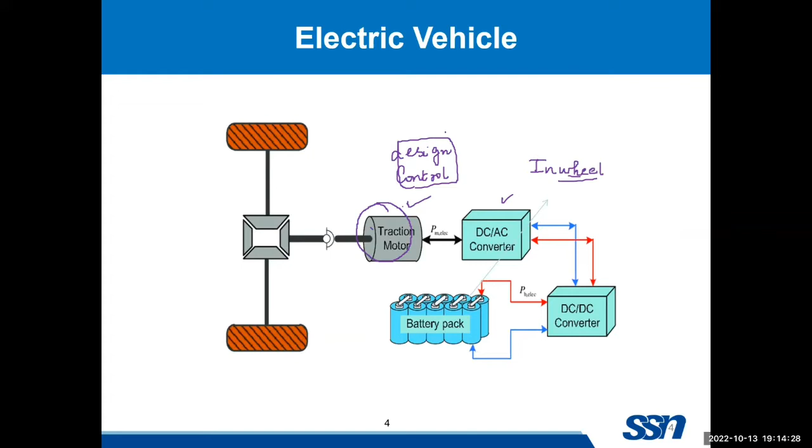So this is the general structure of the electric vehicle. And as I said, when you take electric motors, we have numerous choices of electric motors. The general classification is AC motors and DC motors. Here there are different classifications, and the AC machines are classified into asynchronous machines as well as synchronous machines.

And we know that synchronous machines have thrown up an area of what we call special electrical motors. The structure of the special electrical motors has emanated from synchronous motors. That is why they have classified the special electrical motors under the category of synchronous motors. We can have brushless DC motors, or pure permanent magnet motors. We can have a sine wave motor, a stepper motor, reluctance motors.

So these are all the wider configurations of motors which have been constantly explored not only for EV applications but for all the other applications. Work is also done in the case of induction motors. Equally, induction motors as well as PM motors are being explored for electric vehicle applications. And a newer breed of motors, what we call synchronous reluctance motors, are also being widely explored in addition to switched reluctance motors, which work on the reluctance principle.

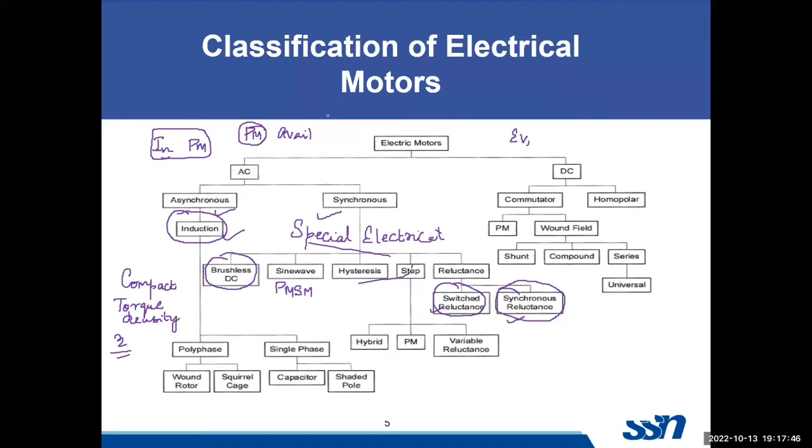And we'll throw light upon all these things in the offline mode, where we'll discuss all these categories. So this is a general classification of motors, and all these motors are being constantly explored. For academic purposes, there is a lot of scope for work in the design and control aspects of electrical motors. And as I said, not only EV applications, there are wider applications of electrical motors, right from small toy car motors to mixers and grinders. All these motors are driven by certain constraints, or certain performance criteria, wherein we try to explore different configurations of electrical motors.

So it is not limited. The point that I am trying to convey is it is not limited to electric vehicle applications. It can be explored for a lot of applications, and these are some of the applications I have listed. If we take BLDC motors, they are used in home appliances, printers, industrial equipment, automotive, which is what we are discussing, building controls and medical equipment. So BLDC, or what we call permanent magnet motors, are being preferred for all these applications.

And this structure is very important. Whenever we call it a drive, the control aspect plays a very important part. The power electronics, the power converter interface, plays a very important part. The motor, as we discussed, plays an important part. And the load, which is nothing but the applications that we are going to consider, plays a very vital role.

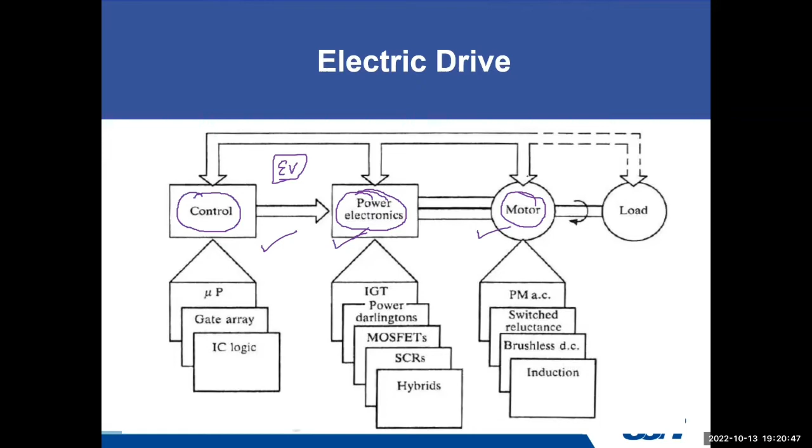So when we take a drive as a whole, it comprises a controller, power converters and a motor coupled with the load. And especially when we take an EV application, these are all the probable academic works that can be explored for research. On the utility side there is a lot of work going on, in the control aspect there has been a lot of work, and machine design, sensorless estimation. So all these are probable academic research areas which can be taken up.

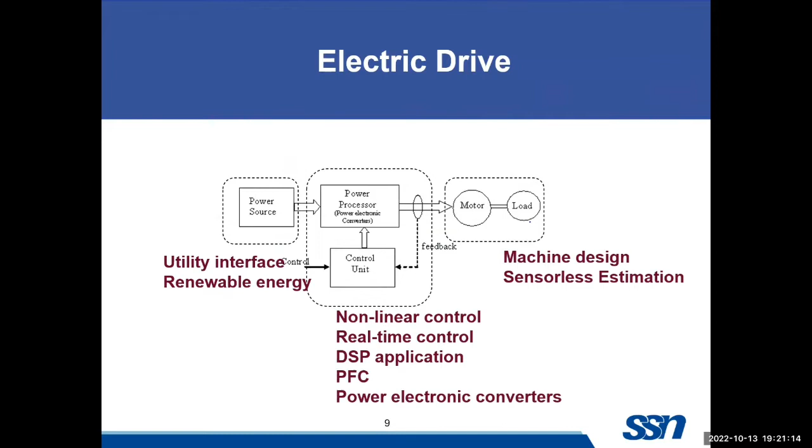And whenever we do a simulation for EV applications, we need to integrate it with the drive cycle. This is a representation of the Indian drive cycle. So whenever we do a simulation with respect to EV for any motor, we need to give this particular drive cycle as input and see whether the performance matches with it. This is again a very important aspect. We need to see whether the controller design matches with the drive cycle.

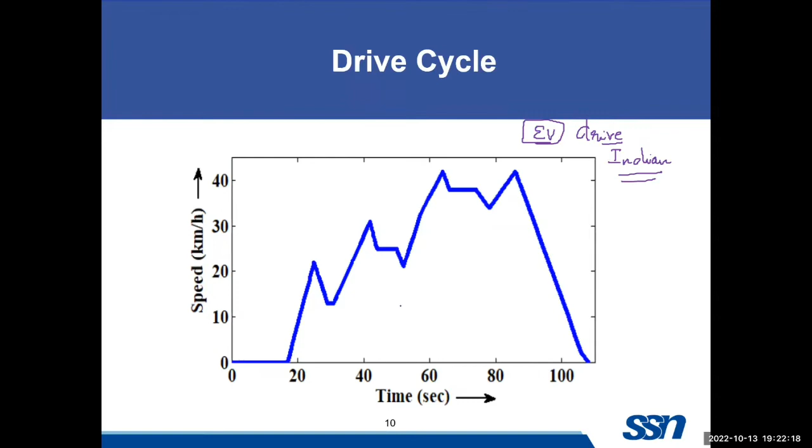For every country, there will be a drive cycle. What is meant by a drive cycle? What will be the acceleration time? What will be the nature of movement of the electric vehicle on Indian roads? That is what is depicted here. Whenever we design the controller, it should be able to meet these requirements of the Indian drive cycle. We need to keep that point in mind whenever we are working on the simulation aspects of electric vehicles. So this is a general introduction.

Now we come to the aspects of faults. When we take electrical machine faults and condition monitoring systems, again there is a classification. Faults can be classified into three categories: one we call electrical faults, the other mechanical faults, and the third is faults because of some external devices. So the mechanical failures include bearing failure, drive mechanism, all those things.

So whenever we take the electrical aspects, we need to have an eye on the stator part, the rotor part, the commutator and brushes. This is a general classification. And similarly, when we take the case of mechanical aspects: the air gap eccentricity, shaft, bearing, gearbox. So all these things are the possibilities of fault. And we can also expect a fault from an external device as well.

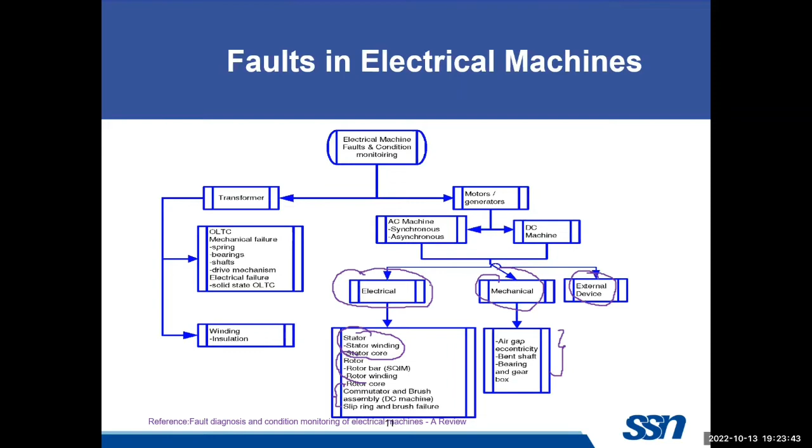So like this, we can categorize the fault, and we need to have a corrective action whenever a fault occurs. To ensure a reliable operation of the drive, we need to take a corrective action. So we know the effects of fault, why fault diagnosis is very important. Not only is fault diagnosis important; we need to diagnose the fault, and then we need to take a remedial action. So that is more important.

So what are the variations? Because of fault, we get unbalanced voltages and line currents. We have increased torque pulsations, the average torque decreases, and reduction in efficiency. So these are some of the drawbacks of the fault.

Now, how to diagnose a fault? We assume that the motor is running, or that the electric vehicle is running. Whenever a fault occurs, how are we going to identify that there is a fault? So that is going to be a challenge. So what sort of techniques can we use?

So what we tend to do is we have a signal measurement. What is this signal? This signal can be current. It can be voltage. We can have a speed signal, or we can have the torque variations. It all depends. Or it can be some sensors which are mounted on the machines. So we first measure the signals, and based on the signals, we need to identify whether a fault has occurred or not. So we need to monitor this signal. That is what we call condition monitoring.

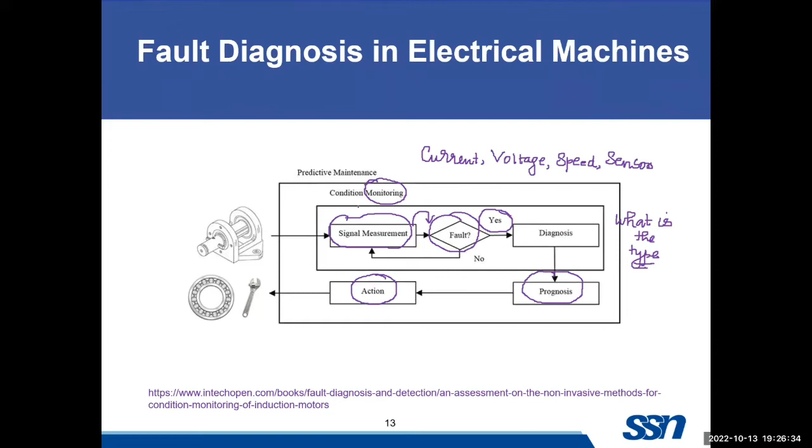So this is the general thing that we will be discussing in today's session. What sort of signals are there? How can we measure the signals? And from the signals, how can we identify whether there is a fault? If there is a fault, we can go for corrective action. So this is how it is done. That is why we call it condition monitoring.

So when we take electrical machine fault diagnosis, we have motor fault types. As we have seen, motor fault types can be mechanical faults: eccentricity and coupled gear faults, bearing fault. And electrical faults, we take as stator fault and rotor fault. Suppose we have Hall sensors for rotor position estimation, we can also have a Hall sensor fault, because Hall sensors are required for estimating the rotor position for all the so-called special electrical machines, or non-classical motors. The Hall sensors play a very important role.

So now, how are we going to diagnose the fault? There are two things that the literature says. One is what we call invasive techniques. The other is what we call non-invasive techniques. So what are invasive techniques and non-invasive techniques?

Now, when we take non-invasive techniques, we do not have a physical sensor, a special sensor, which will identify the fault. It will be mostly based on current signature analysis. The sensor is not mounted on the motor itself. Here we sense the motor current with the help of a current sensor.

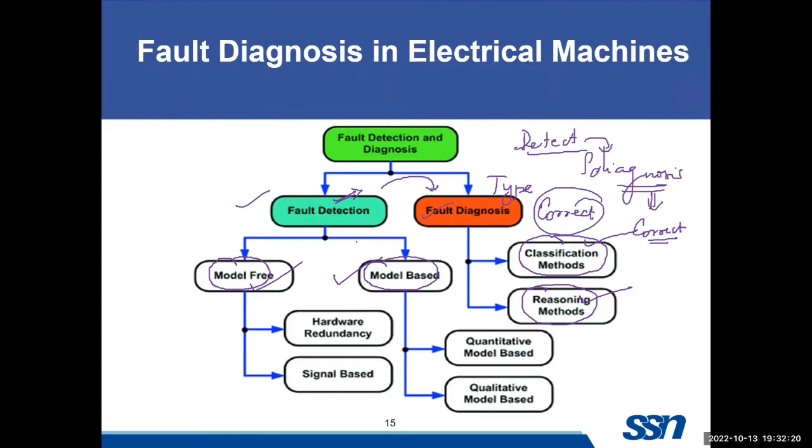So please understand, there are two approaches. One, we need to detect the fault. And if a fault has occurred, we need to diagnose the fault. That is the second step. And the third one, we need to take the corrective action. There are three steps: detection, diagnosis, and correction. How are we going to correct the fault? So this is the procedure, and for this they have devised some methods.

Now, what is the model-based method? In a model-based method, there will be a model and there will be an actual system. We give the inputs to these systems; the model predicts the output, and this is the actual output. Based on the output, we can make a decision whether the fault has occurred or not. So that is what we call a model-based method. Right?

In both methods the same inputs will be provided, depending upon the output from both the models. So we'll be able to train it, and we'll be able to make a decision using some algorithm. We'll be able to detect. So that is what we call a model-based method.

Model-based fault detection is classified into qualitative model-based and quantitative model-based. The qualitative one is based on some knowledge. If this parameter is greater than this, then they have a decision tree like approach, trend analysis, causal models, or hierarchy based models. Because with the inner loop and outer loop, we say this current has to be greater than this current, then it is a stator fault, stator A phase fault. Like this, you can have some analysis qualitatively, and we can see whether the fault has occurred or not.

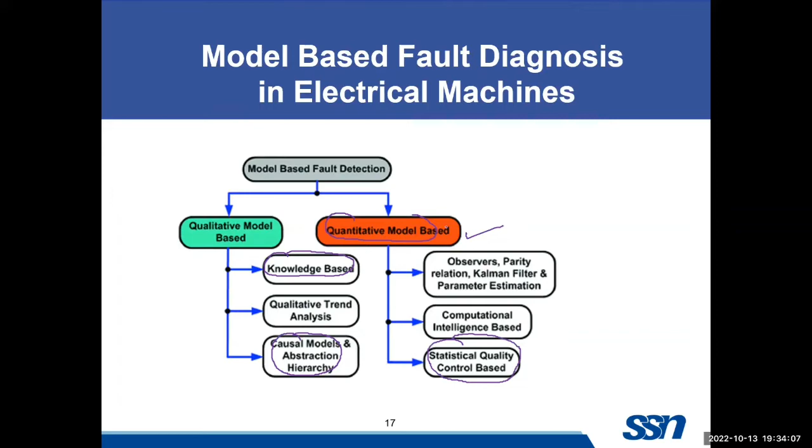The second method is what we call a quantitative method, wherein we estimate the parameters using filters, computational intelligence based methods, or statistical values. We take some statistical values, and then we see whether the fault has occurred or not. So either we can go for a qualitative method, or we can go for a quantitative method. So this is the method of fault detection.

Similarly, we can also predict the fault in electric drives, in power converters. So far we have seen the motor part. Similarly, if there is a fault in power devices, the possibility can be a capacitor fault, an IGBT fault, a diode fault, or a controller fault itself. A controller can misfire, in the sense there will not be any output from the controller. So that is one more type of fault which can occur in this particular drive as a whole. So these are all the different power semiconductor device faults.

So how to detect the semiconductor fault? Again, we have model based algorithms, or we can go for signal processing based methods. Signal processing based methods in the sense we sense the current, and based on this we have a time domain analysis and a frequency domain analysis. From this we take the values and see whether there is a fault or not. So this is one type of method which we can adopt for analyzing the semiconductor fault.

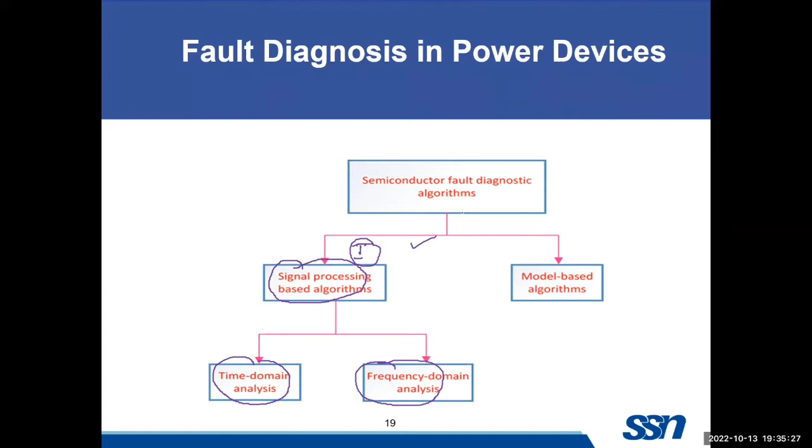So far it is generic; we have discussed it for the induction motor as a whole. But when we take other types of machines, especially permanent magnet machines, in addition to the conventional faults in the stator, we can also have a magnetization problem. And as I said, we can also include the Hall sensor part. So we can have a short circuit fault, open circuit fault, unbalanced circuit, eccentricity fault. This is conventional, and apart from this we can include a Hall sensor fault or magnetization part. So this is with respect to faults in permanent magnet machines.

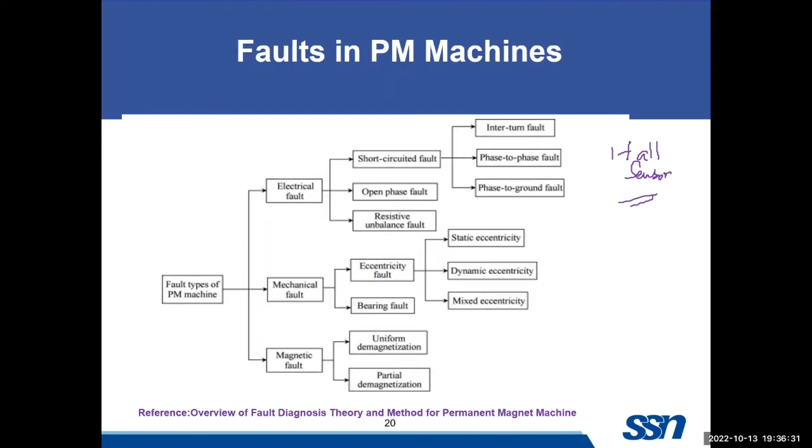As we are predominantly using permanent magnet motors as well as induction motors, I have illustrated what type of parameters we can take for each category of machines. So this is the approach for a non-invasive method. From this is what we are going to carry on. I am going to give a demonstration of this aspect.

So we sense the three-phase voltage, the three-phase current, and the flux from the motor. We give it to a signal conditioning circuit, because we need to eliminate the noise from the circuits. And data sampling is very important: how frequently we are going to sample the data. So we take the voltage, we denoise or filter it, and then we sample. Sampling is a very important part.

We sample it; we take 1,000 samples, or we take the sampling frequency as 1 kilohertz, just for example. So for every 1,000 values, we'll monitor the parameters, and then we estimate. And this step is very important, what we call feature extraction. Now, what is this feature extraction?

This feature extraction will say whether there is a fault or not. Okay, so simply to understand, I'll give a simple example of what we call feature extraction.

Now, how do we remember different things that we see in our day-to-day life? How do we remember our friends that we see in our day-to-day life? Our brain recognizes the features of that particular person. So he'll be tall, he'll have curly hair like this. So those are the features which characterize a particular person.

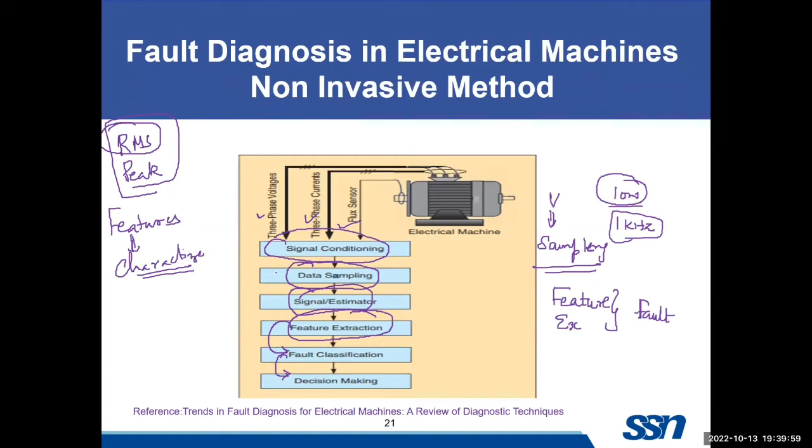Right? For the invasive method, what we tend to do is take the vibration signals. We have a segmentation. We have a statistical feature extraction. And here again, feature extraction plays a very important role. Whether we go for an invasive technique or a non-invasive technique, both techniques will involve feature extraction.

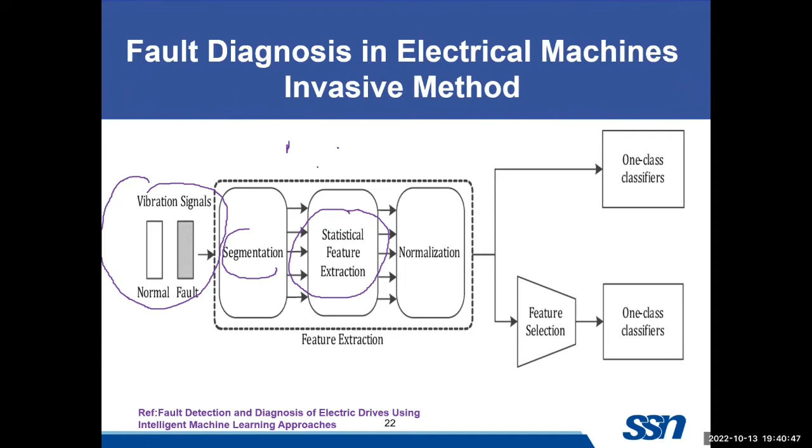Here we physically mount a sensor and take it, whereas there we take it from the current value itself. We can go for a hybrid combination: a vibration signal and also a current signal to have a better classification of a fault. So this is what we call an invasive method. We physically mount the sensors.

So what are the steps? We have a data collection part. We have a feature extraction part. From the feature extraction part, we go for fault detection and fault diagnosis. So these are the steps. So where do we collect the data? We collect the data either from hardware or through simulation. And then we extract the features and say whether there is a fault or not.

Okay, so the data collection is very vital. The more training and testing data we have, the more accurate the output will be. And one more thing, the simulation model that we built should also be accurate, and it should match with the hardware. So that is very important. Only then can we implement these algorithms and see whether they are really able to detect the fault or not. So these are the steps.

And the next thing is, whenever I say I want to extract the features, it is a time varying quantity. When we go for a time varying quantity, the frequency of the signals will also change depending upon the fault and occurrence of fault. So generally, we go for time frequency analysis for predicting the fault.

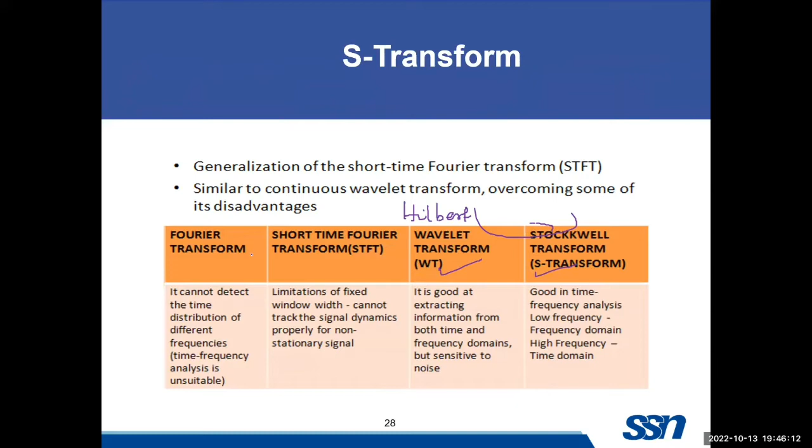Whenever I apply a Stockwell transform, S transform, I'll get a value. What input do I give to the S transform? I'll give the input current. The S transform will process the input and it will give a matrix, which I call the S matrix. And from the S matrix, I'll extract the features. We'll have a demonstration in the second part of the session, wherein you'll be able to understand this.

So I take the features F1 and F2. These features are nothing but the mean of the maximum amplitude plot, outputs from the S matrix. For simplicity, I have taken these two features.

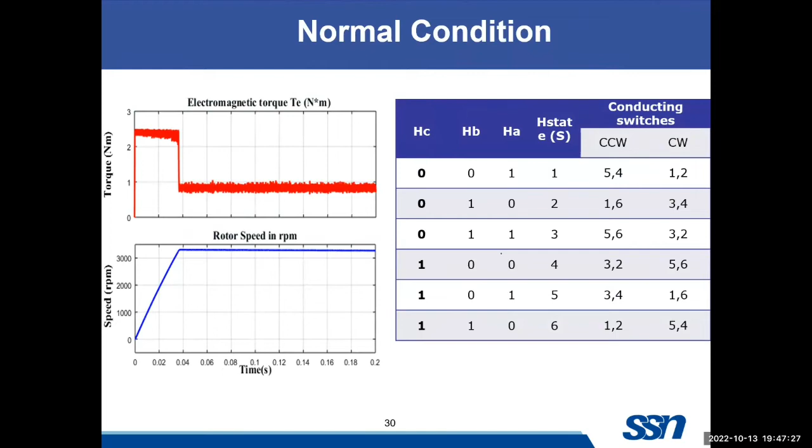Now, this is the motor running under normal condition, and the Hall sensor pattern is like this. We extract the features under normal condition: F1 value is 0.94, F2 value is 0.048. We take the stator currents IA, IB, and IC, and we extract the values.

Now, this is the waveform. Now, what happens is, suppose when there is a fault, we'll assume that there is a failure in the Hall sensor. Some electronics is in problem, and there is a failure in the Hall sensor. So when there is a failure in this Hall sensor, what happens? The output from the Hall sensor becomes 0.

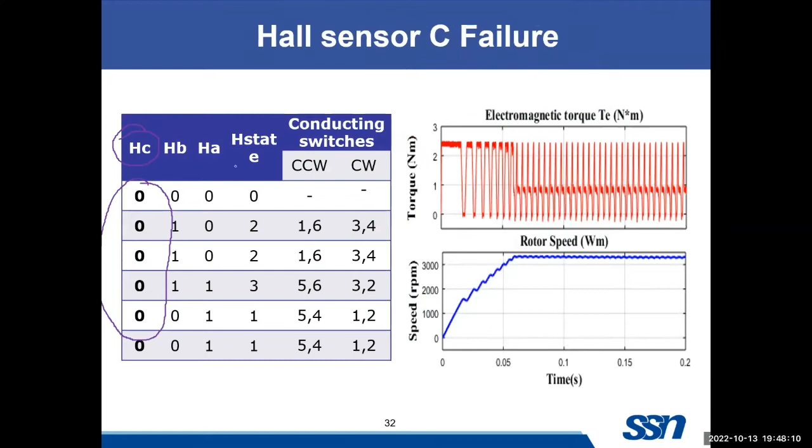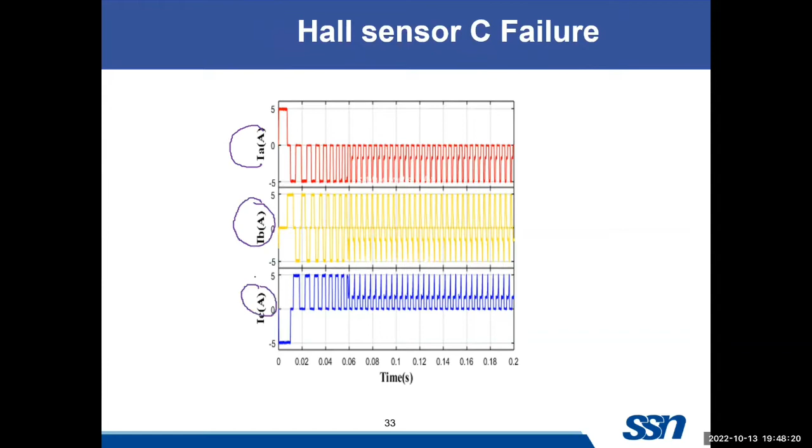So what will happen? There will be a deviation in the waveform. So see, there is a deviation in the A phase current, there is a deviation in the B phase current, and there is a deviation in the C phase current. So when there is a deviation, the value of the extracted features will change with respect to a single phase failure. The features that I extract, as I said, are used for characterization. The features that I extracted will change. So when the features change, we can say the fault has occurred.

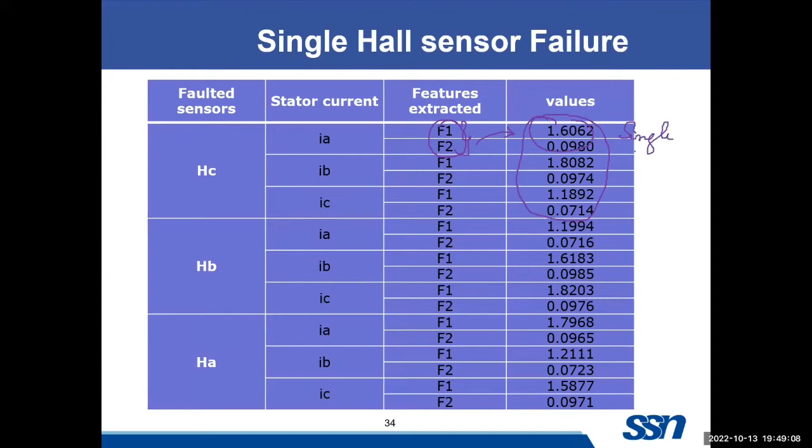I need to write a program and monitor these features and find out whether there is a deviation from the original value. If there is a deviation from the original value, I can say there is a fault. What type of fault? If the value is in this range, it is a single Hall sensor failure. If the value is in the other range, I can say it is a double Hall sensor failure. When there is a double Hall sensor failure, see, the value is changing.

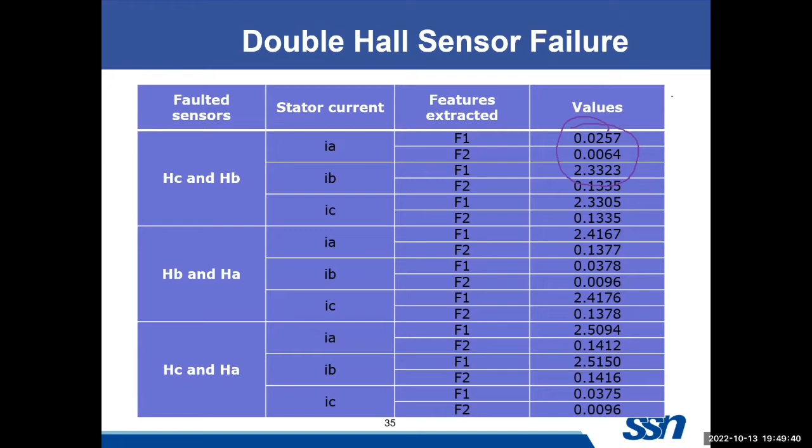So either I can go for a simple decision tree algorithm, or I can go for some machine learning classifiers to say whether there is a fault or not. So these are the features, and the feature values are changing when there is a fault. So how do we do this? We initiate a closed loop control of BLDC motor. We analyze the stator current waveform. We apply S transform and extract the features.

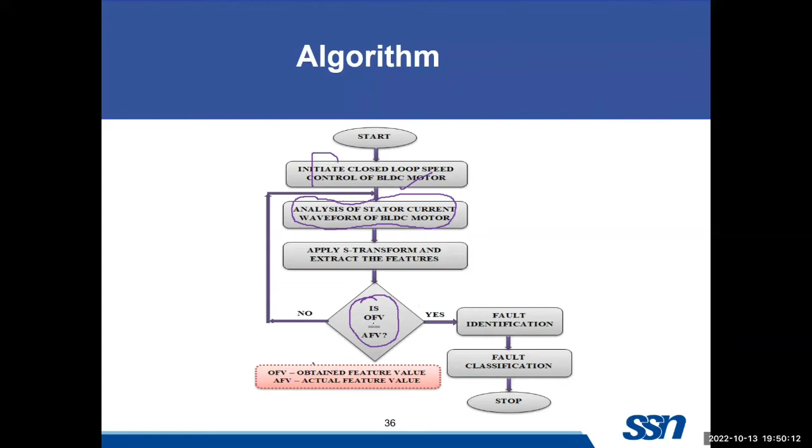See if the observed value is equal to the actual value, or we can say obtained feature value is equal to the actual feature value. So what will happen if it is not equal? If it is not equal, we have the identification. We go for the routine. So this is how generally a fault identification and fault classification is done. This is one approach.

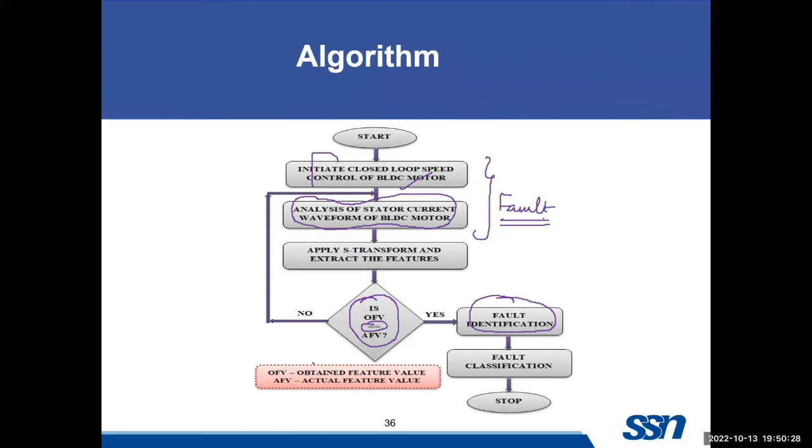See what I do, how it is implemented. So there will be a master controller. We get the waveforms and we write an algorithm for S transform. The S transform features will be given to a master controller, and it will say whether there is a single sensor fault or a double sensor fault. So while we implement in hardware, we need to extract the features, and then we need to classify whether it is a single sensor fault or a double sensor fault. So this is how a fault diagnosis is carried out in a BLDC drive for a Hall sensor failure.

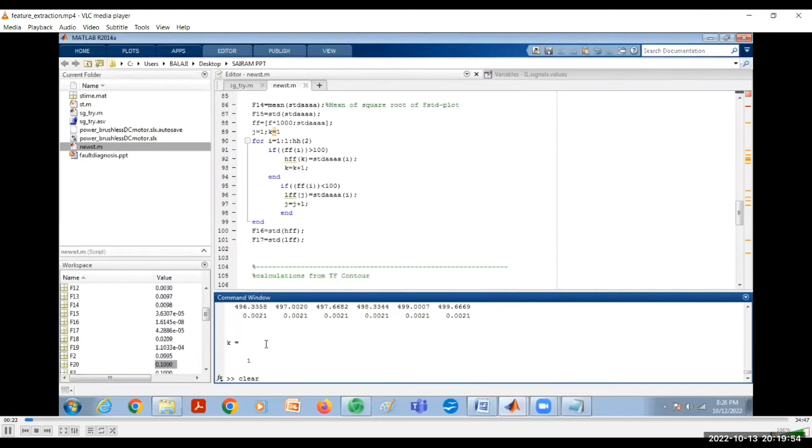So I'll take first a general sine wave, and we will see how to extract the features of the sine wave, and then I'll take a sag wave, and then a swell, and I'll show how the features will vary. Once it is over, we'll proceed to how to extract the features in the same way for the BLDC motor that we have used in an electric vehicle, or any induction motor or any motor you can use

the same procedure. So as I said in my lecture, whenever we want to identify a fault, there are two steps. The first step is we need to extract the features. The second step is we need to classify what kind of fault. So we are in the first stage, feature extraction. So for this, first I'll generate a simple sine wave for simplicity.

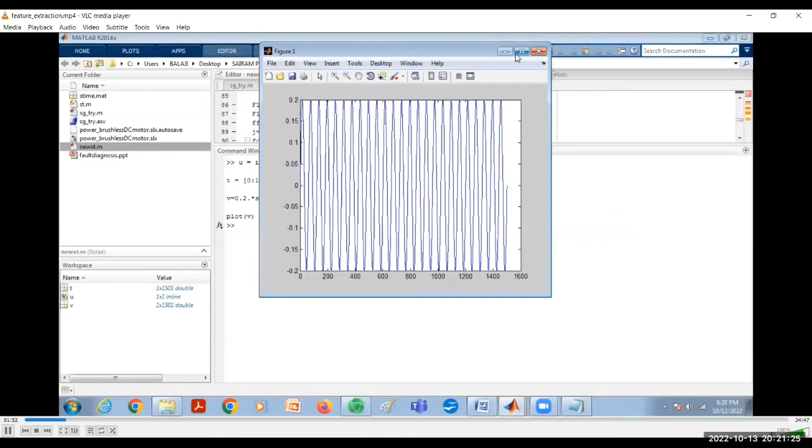These are all the initialization instructions. I initialize the value of t and give the limit for t. T varies from 0 to 0.5; this is the time interval. And I'll say v is equal to 0.2 into sine omega t, and then the plot command. So we will get a normal sine wave. This is the waveform of a normal sine wave.

Now, the algorithm that we are going to use should identify this as a sine wave. This is a time varying waveform, the waveform varies with respect to time. So we need to apply a transformation technique and extract the features that will characterize this waveform. We should get numerical values that will characterize the waveform.

We can take the RMS value of this, but when we have more number of features or more number of waveforms, then RMS value might not be a good indicator. So we'll go for the transformation techniques, S transform and Hilbert transform. So we'll see how to use the transformation technique.

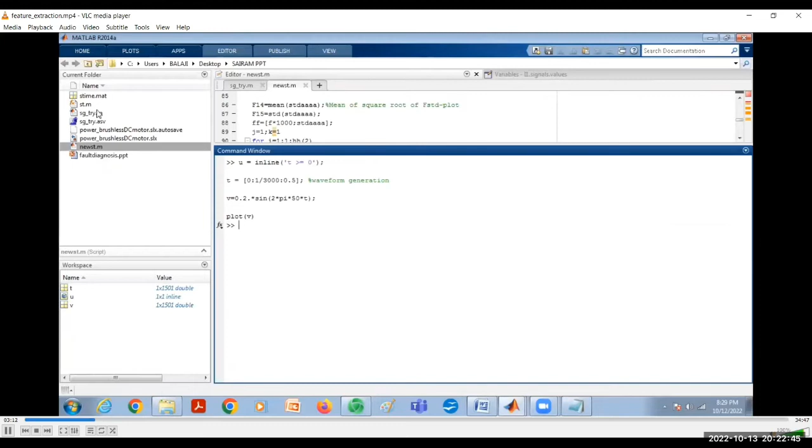So I have stored the values in a variable called V. Now I am going to apply an S transform. To apply the S transform, I have a pre-written program. Just 1 minute, it will open.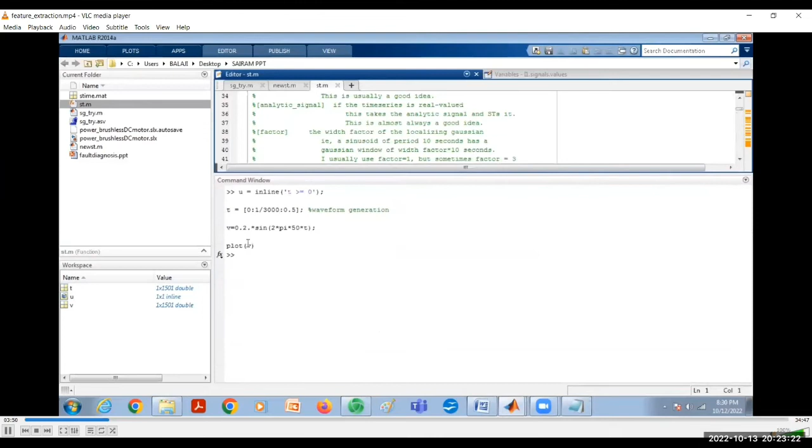I have a pre-written program. See, the program is open here. So this program, which is available in MATLAB, will give the S transform features. So for this, what is the input? The input is going to be my waveform. Here I have taken it as a sine waveform, right? And I need to extract the features.

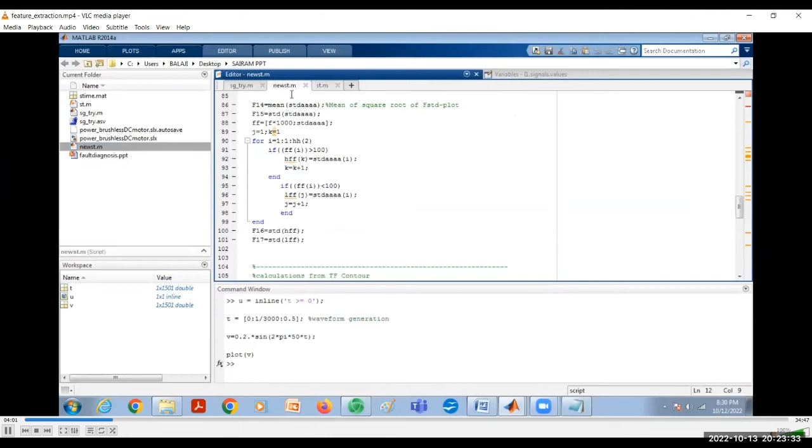So I have written a program called new ST. You can have any name. So there are two programs. One we call new ST, which is used to extract the features. Here I have written a subprogram. So what I do is I take the S matrix. ST stands for S matrix, T stands for time, F stands for frequency, and I give the input value as V. V is my sine wave.

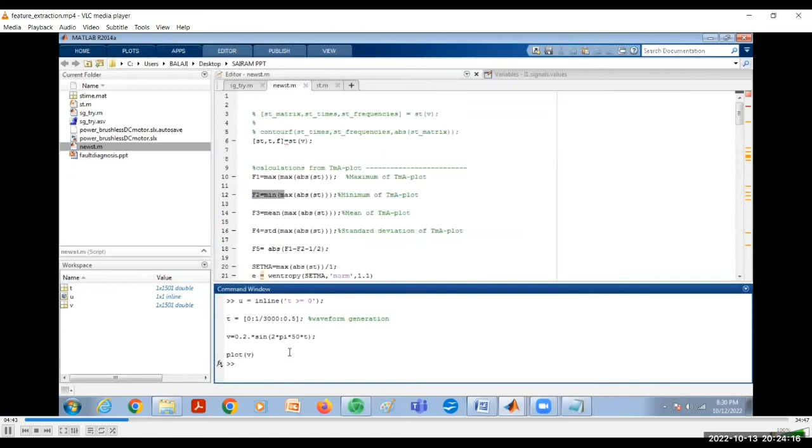So when I execute this particular program, it will in turn call this ST, and I'll get the features. So F1, F2, F3, F4, F5, I have taken 20 features. We'll get the values of those 20 features. So that is the first step. So what is the first step? I'll give this program new ST.

I'll give new ST. So when you see, this will take the S transform, and here we'll get the features. We'll get F1 to F10, because it is arranged like this. Like this, I have initialized 20 features. I'm not going into the details of what features we have used. So these are all the values.

So for example, for a particular sine waveform, the magnitude we have kept as only 0.2. If you see the plot of the waveform, you will be able to see. So what is F1? F1 is the maximum of the time amplitude plot. The S matrix will return two values, time as well as frequency. So the first four features represent the time amplitude plot, or we call it the time maximum amplitude plot.

So I'll write it here, just for understanding purpose. This is a normal waveform. I'll give different magnitudes here. I'll say here 0.2, and here I'll say 1, meaning the magnitude is higher. So what is the value of F1? Here F1 is 0.1. How do we calculate F1? We calculate F1 from the S matrix. So F1 is 0.1, or we can also type it here.

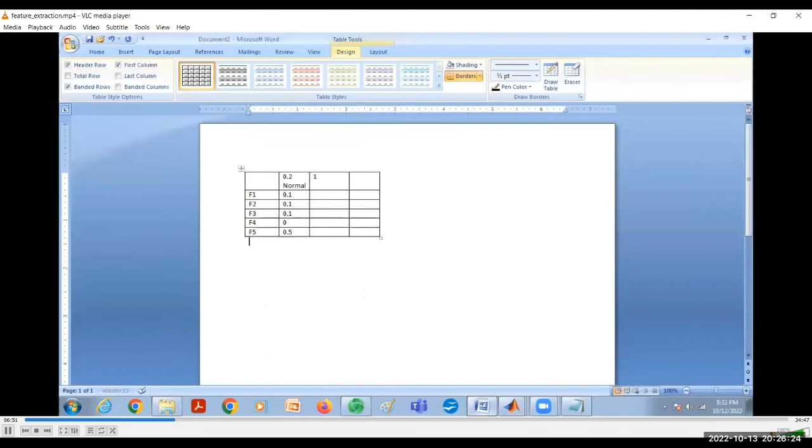So like this, we extract the features for each and every waveform. F5 is 0.5, so I'll put it as 0.5. So this is for a normal waveform with amplitude 0.2. Now I'll clear this. You can also get a normal waveform with a higher amplitude. So I'll just take this and put it as 1.

And I'll first plot this waveform. So when you plot this waveform, now we have a higher amplitude. So this is also a normal waveform. Why we are doing this exercise is because it should differentiate the normal condition from, say, a sag condition or a swell condition. So this is not a swell. It is a normal sine waveform.

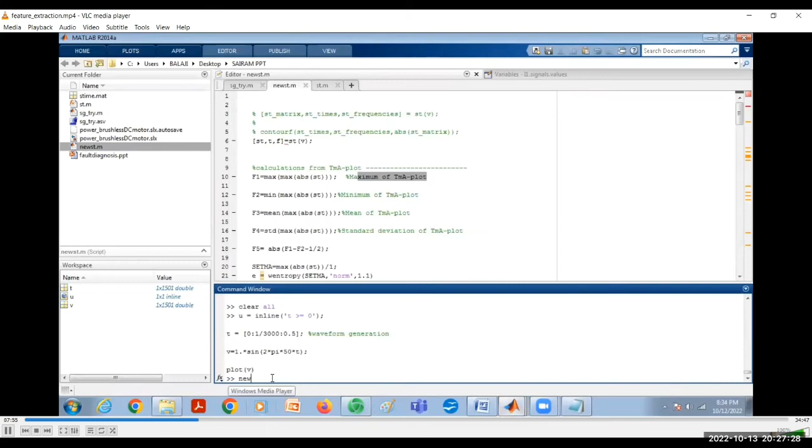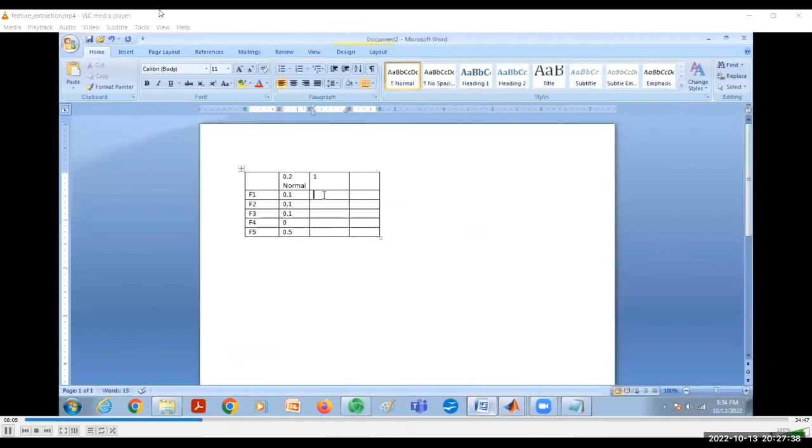So even for a normal waveform, when the amplitude varies, the feature values will vary. That is why we take different waveforms as inputs and we train the machine learning algorithm. So here again, for a normal waveform, I do the S matrix and calculate the value. Even though it is a normal waveform, F1 is 0.5. F2 is also 0.5. F3 is 0.5. F4 is 0. F5 is 0.5.

So these are all the values. So what is differentiating all these things? 0.5, right? So how will the machine learning algorithm work? It will check whether the values are in this particular range, then we can classify them as a normal condition. See here it's all 0.1, F5 is 0.5 in both the cases, whereas F1, F2, F3 values will change. So this is for one amplitude, I'll call it a normal condition.

Normal condition. So what are these things? These are what we call features, which characterize the waveform. Now to make it more clear, I'll take a sag waveform. So in a sag waveform, I'll first generate a sag. So this is the syntax for generating the sag, right? When you see the waveform, you'll be able to understand. So I'll generate a sag first.

Let's say CLC. I'll generate a sag. Okay, so plot V. So see here it is, sorry, this is a swell. If I want to have a sag, I'll just change this value of V as 1 minus. If I put 1 minus, it will be a sag. 1 plus, it will be a swell. So I'll say plot V.

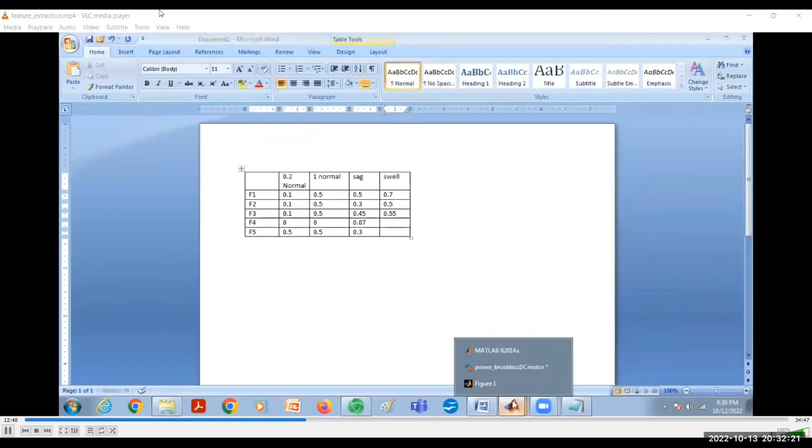So see here, F1 is 0.7. F2 is 0.5. F3 is 0.55. And F4 is the same value, 0.07, and F5 is 0.3. So here there is a difference. Okay. So that is why we take more features.

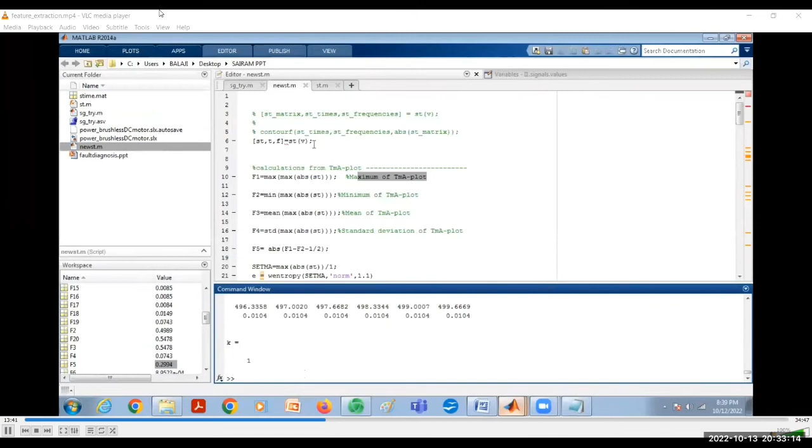So what have we done? First we have done an S transform. And from that S transform, we have extracted the features. We first generated a waveform, and we extracted the features. And we will see what features come for different waveforms. Likewise, we need to generate a data set. So this is one transformation technique, which we call the S transform, or Stockwell transform. So in this program, I take the S transform, and the S matrix will be stored in ST.

And I do a calculation, which is mostly mathematics based, and I extract the features. So what are features? Features are used to characterize the waveforms. Okay, so this is a program that has been written, and features are extracted. Here, for example, I have taken 20 features. Not all 20 features will be required. You can optimize that as well. So that is one more separate part. So this is one part of it.

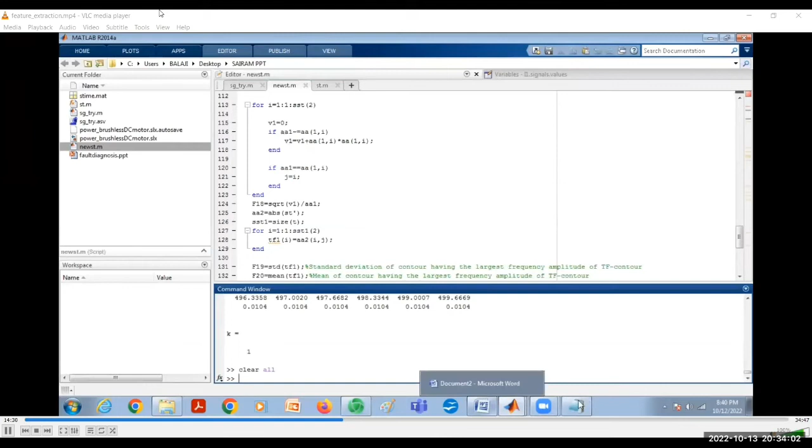There is one more time frequency transform, which we call the Hilbert transform. So that also we can use. So you have a sag waveform here. I'll apply a value here. So again, I'll plot V. So we'll get the waveform. We'll get the swell waveform.

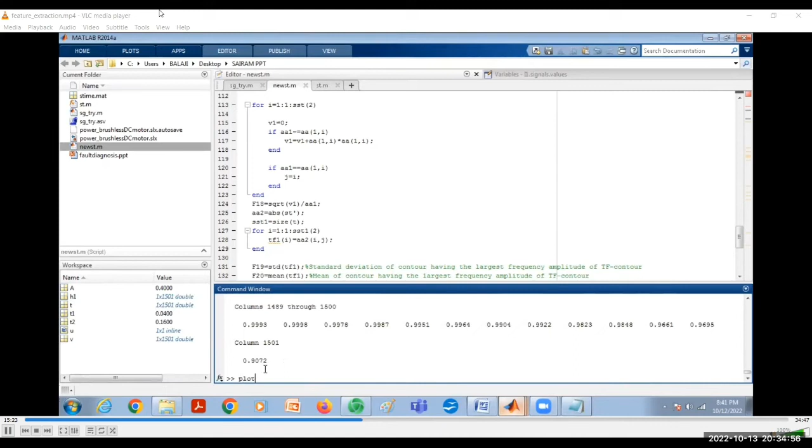Now to apply a Hilbert transform, what we can do is, I'll say H1 is equal to Hilbert of V. V is my waveform. So see what happens, the Hilbert transformation will be generated. This consists of a complex value, so I can extract the real values. I'll say absolute of Hilbert of V. Now I'll say plot of H1. So see what happens when I plot it.

So this will represent, there is a swell here. See, in this portion, there is a swell. The other portions are normal at 1. So this is what we call the Hilbert transform. So now how to characterize this? To characterize this, again I can take the features. I can say mean of H1. So mean of H1 is 1.0957. So this is one technique. This we can extend. We can have some more features, and you can characterize the features corresponding to that particular wave.

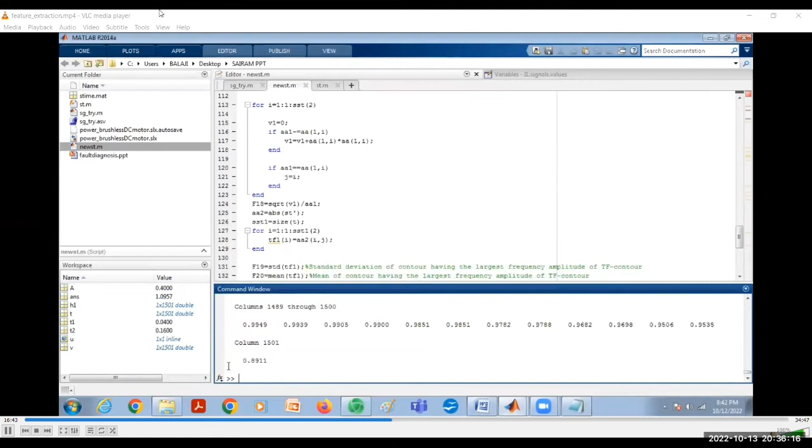Now the same thing, we'll just take up one more example. I have taken a swell now. Now I'll take a sag. So when I take a sag, I'll just give the value. I'll say plot of V. So now there is a sag waveform. So for this sag waveform, I'll take the Hilbert transform. Now I'll say plot of H1.

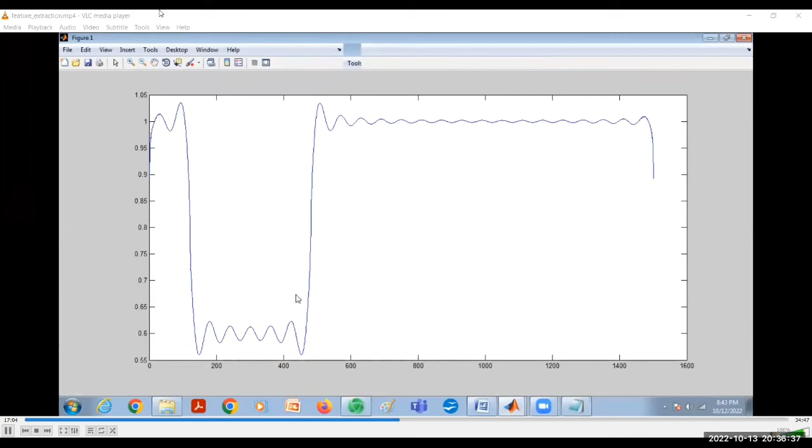So see here, there is a marked difference between those two waveforms. In the first swell waveform, there was a swell, but now here there is a sag. So there is a dip here. So it means that there is a variation here. Now, if I take mean of H1, it will be different. It is only 0.9, indicating that there is a sag. You can also make different instances of sag and swell.

So here, the value that we have given is A is 0.4, 1 plus 0.4. It means that it will be 1.4. Here I will say it starts at 0.16 and it will end at 0.24, for example. So I'll generate a different instant. I'll say clear all just to show the difference. Since we saw the swell and sag waveform, I'll just take it as a sag itself. Now I'll take plot of V. See here, now there is a variation in the instant where the sag occurs.

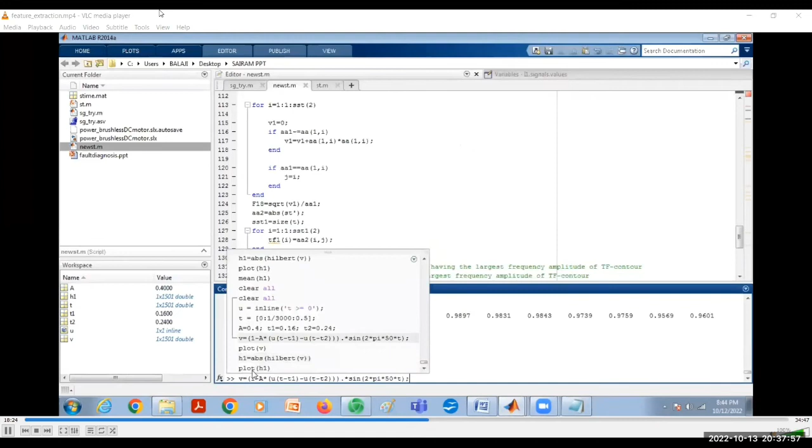So now if I take the Hilbert transform of this, see what happens. I'll plot it. The instant will change. But we'll see what happens to the mean value. The mean value also has changed a little bit. So depending upon the time at which the fault occurs and depending upon the magnitude of the fault, the features will vary. So the features are used to characterize each and every waveform. So this is what we call feature extraction.

Now, when I give these features as input to my classification algorithm, we will be able to classify the nature of the waveform. We can say whether it is a sag, whether it is a swell, or whether it's an interruption.

The same principle we are going to apply for a BLDC motor or for any motor. So what I have done is I have taken a MATLAB model which is already available, for simplicity. I have taken the same reference. So this is the model available in MATLAB just to show how a fault can be created and how you can characterize the fault. So in a BLDC motor, I use an inverter, which is used to drive this BLDC motor. And these are all the measurement parameters.

I have a Hall sensor, and the Hall sensor will be given to the gate signals, which will in turn trigger the gate pulses. It will trigger the gate of the inverter. So this is the normal flow. So I have a Hall sensor. Based on the Hall sensor, the triggering of pulses of the inverter is going to take place.

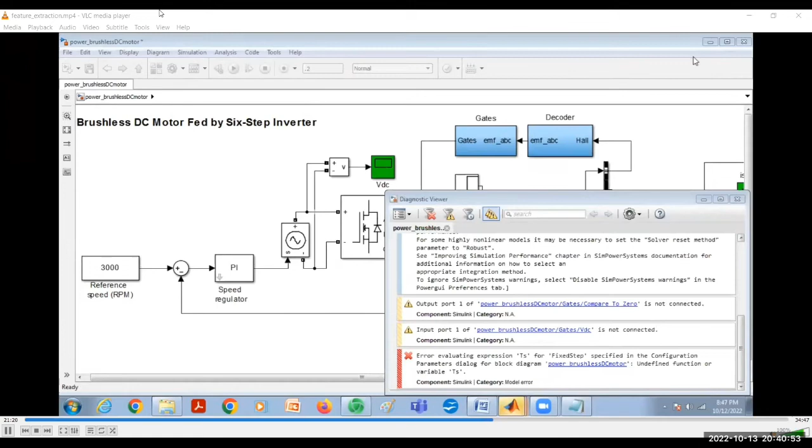So when you execute, this is under normal condition. This is where I have changed this. I'll just show. Yeah, this is compiling. Just a minute. So here I forgot to give one input. So we need to give that input. Sampling time I have not given. So I'll give the sampling time TS as 5e-6. So now it will work.

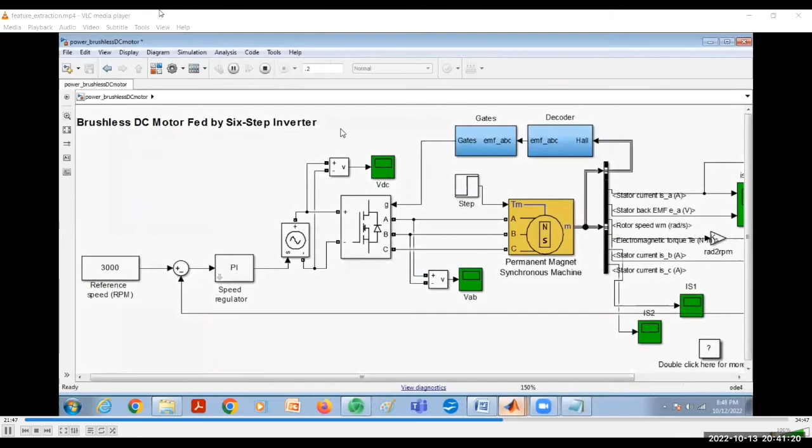So I have given this as input. So we'll see the output waveforms. So when you see, this is the speed, we have given speed as 3000. Sorry, I think I have not changed this here. One minute. So here to introduce fault, I have made a change. So I'll just remove that as well. So now it will work. So we'll see the normal operation.

So when you see here, this is the stator current, back EMF, rotor speed, all these things we are sensing. And this is the normal current waveform for A phase. This is for B phase. And the other is for C phase. And we also get the torque and speed. They have given a step input. Initial value is 0, the final value is 3. So that is why there is variation in torque.

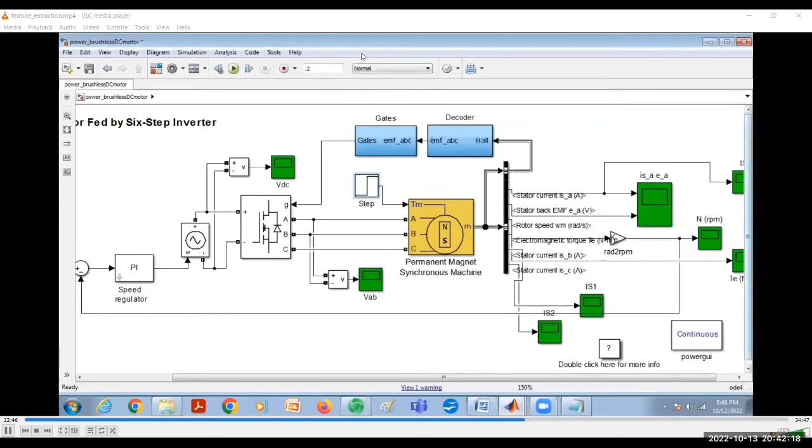Now we want to analyze some fault which is occurring in the inverter. So first we need to take this particular waveform and characterize the features for a normal operation. What are the features that are there for a normal operation? Only then we can characterize the fault. I'll just enumerate the procedure. So this waveform, I have stored it as a variable, I1. The same procedure I am going to apply. That is why I explained the S transform previously.

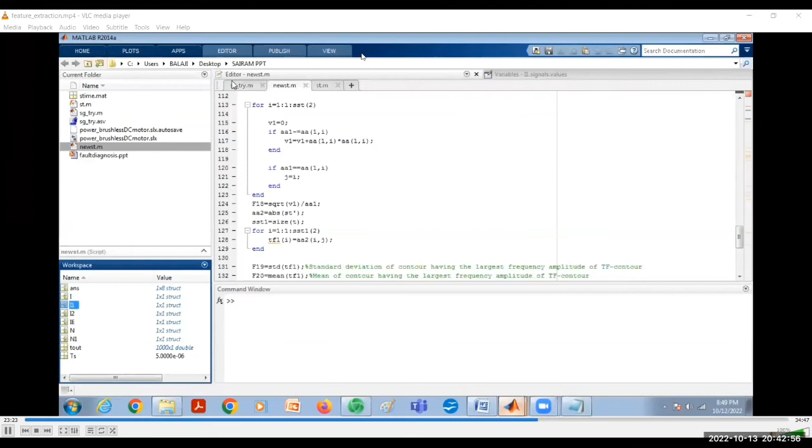So now the variable is I1 here. What I do is I just see the value of I1. I1 is stored in I1.signals.values. So when you see this, there are totally 5,000 values here. So here, that is why sampling plays a very important role. This has to be a continuous process wherein we need to sample the signals. I'll take the first 1,000 values.

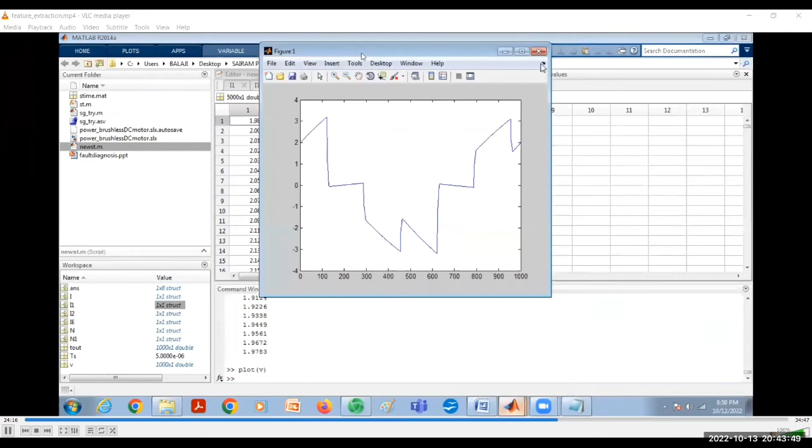So I'll say V is equal to I1.signals.values of 1 to 1,000. I'll take the first 1,000 values. Now I'll plot this V. So when you plot this V, I'll get this waveform. So what I'm going to do is I'll apply the S transform for this particular value. So I'll get the features.

See, F1 is the value, F10, F2. F2 is 1.3140. F3 is 1.3140. F4 is 0. F5 is 0.5. So like this, I take the values. This is for a normal waveform, for phase current A. You can also get the values for different phase currents as well.

Now suppose I am going to introduce a fault. For introducing a fault, you can make these as individual switches and then introduce it, but I am giving a simple procedure. See here, I am giving 1 to the first device. So for the first device, I am removing the signal, and I am going to keep it permanently on. It is not going to be on-off. It is going to be permanently on. So now I'm going to simulate this.

So when I simulate this, see the current characterization. The current value will change because it's like I'm keeping it permanently on. It's like a short circuit, right? So when I take this particular value of current, stator current, see what happens. I'll take the first 1,000 values again. Now I'll take new ST. Okay, it is better to clear this and then do it.

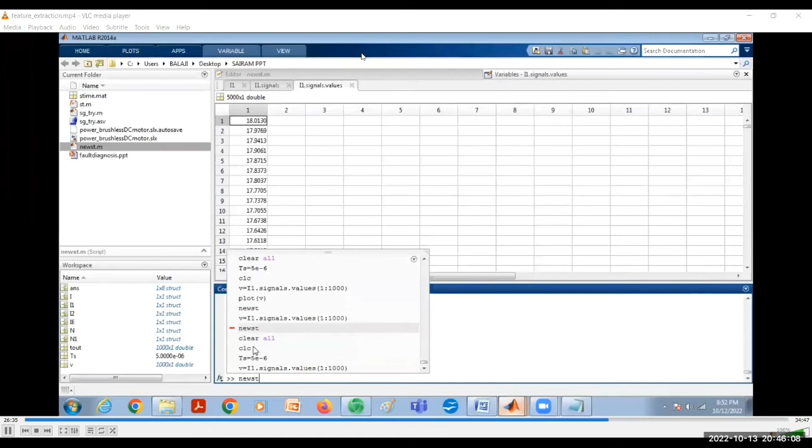I initialize first TS as 5e-6. I'll just run this. So this is under fault condition. So what I do here is I'll take the value of V as 1,000 values. I'll take new ST. So see what happens. Here the value of F1 is 18. So it has jumped to 18. It means that there is a fault.

And the fault can occur in one switch or in multiple switches as well. That is why we go for a machine learning algorithm and more features to accurately classify the fault. Right. So here again, F2 is 18, F3 is 18, F5 is 0.5 because F5 does not change, F4 is again 0. So like this, each and every value is going to change here, which will characterize the fault.

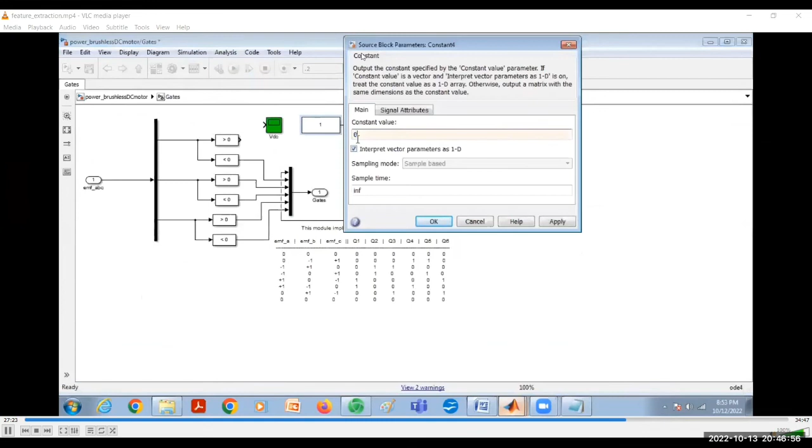One more thing I'll do here: instead of permanently turning on, I'll permanently turn off this switch, right? It is like an open circuit. So that switch will not be triggered at all. So what happens? Here, this is the output. Now again, I'll repeat the same thing. It's better to run again. I'll just say clear all, CLC. I'll just initialize TS. Now I'll run it again.

So what will happen? I again take the first 1000 values. I'll take new ST. Now if you see, the values are different. Now it has become 1.6814. Similarly, F2 is again the same value. This is 0, F5 is 0.5. All the other values are the same. So depending upon the waveform, the feature values will change or stay the same. I have made an open circuit. So there is a distinction between a short circuit, permanently making the switch on, an open circuit, and a normal condition.

So what we need to do? We need to prepare a matrix like this, right? And it should have the waveforms at different time instances. One more very important thing is that the fault can occur at any instant of time. So here I can couple a time and say that only during a particular time there is a fault. For this, we can have a step waveform and say when it becomes 0 and when it becomes 1. You can give a step input and vary the instant of fault.

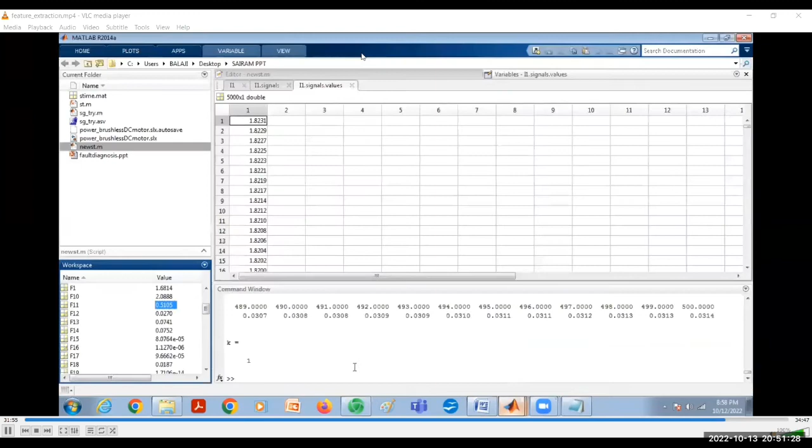It need not be an S transform. So as we discussed, you can also take a Hilbert transform as well. So I'll say TS here just to illustrate this. I'll run this program. You can also apply a Hilbert transform, and from the Hilbert transform also you can take the values.

So see, I'll again say the values here. I'll say the command h1 is equal to Hilbert of absolute of v. Right. So I'll say plot of v. So this will give a plot indicating that it is a decreasing one, because I have made it as 0, because the value we have given at the gate is 0.

Now we can also take the Hilbert transform. So what we can do is we can take the Hilbert value, mean of h1. So mean of h1 will be 0. Now if I introduce it as a permanent 1, if I keep it as 1 itself, then again there might be a change. So there is a variation here.

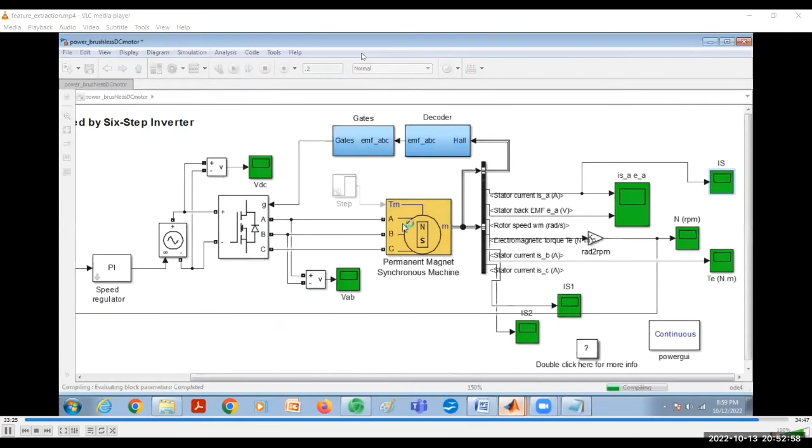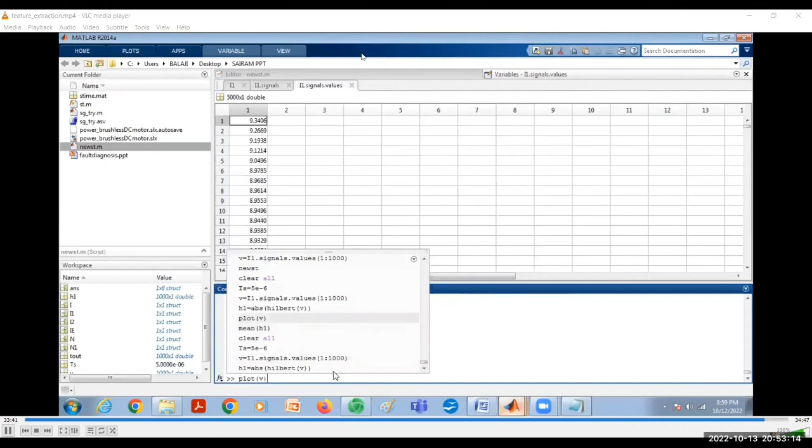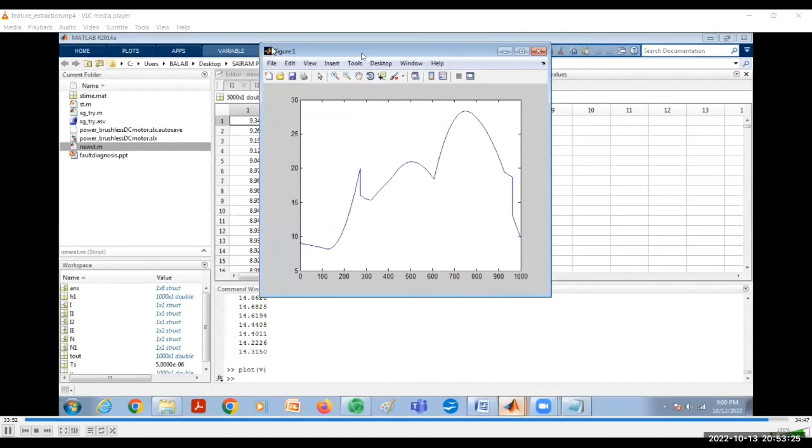So what I do here is, it is better to clear it. I'll say clear all. I'll initialize this, and now I'll again simulate it. See what I'm doing? I'm again taking the first 1000 values and Hilbert, and I'll say plot. So see, there is a change in the nature of the waveform because it is permanently 1. And now if I take the mean of Hilbert transform, the value is changed.

So likewise, for different fault conditions, you can extract the features, and these features will form an input to your classification algorithm. This is the first part. So I have explained how to extract the features using the feature extraction technique, namely time frequency transformation technique, namely S transform and Hilbert transform. Next, we'll see how to classify this using the machine learning classifiers. That is the second part.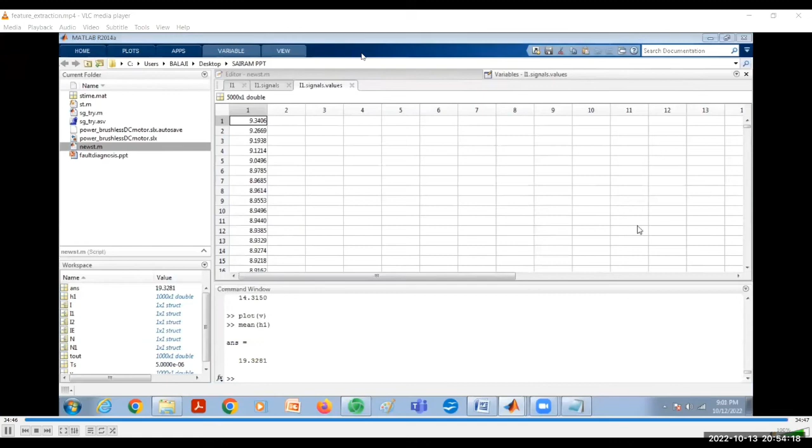Yes, I have made this presentation with the objective of showing things in MATLAB, how it can be actually done. So if you want to work on this, you can have a real-time experience of how to do this in MATLAB, right?

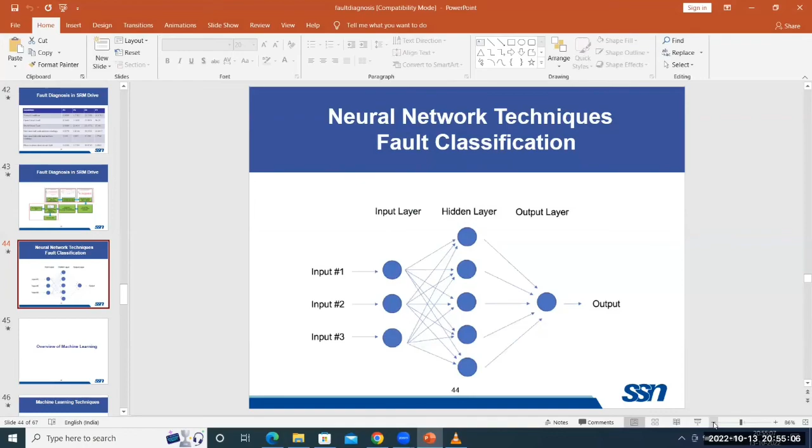Any questions? I can take it, or else we can proceed. Any clarifications or suggestions in this aspect? Right. Okay. So if there are no clarifications, we'll proceed to the last part.

So I have divided this into 3 categories. One is the basic theory part of how to have a fault diagnosis. The second one is how to have the database generated. Now we'll go to the actual machine learning part, how a machine learning classifier is going to work. I'll just take one more application of a machine learning classifier and I'll illustrate it. So that is the fault classification part.

So generally, now we have understood that we have a database. So what is there in the database? The database will have the features, and what is the class, whether it is a no fault condition, or an open circuit fault condition, or a short circuit fault condition. Like this, there will be different classes. So for characterization of each feature, we'll have some examples, some values. So we have this database.

Now, once we have this database, we need to have a classifier. So for this, you can go for a simple or conventional artificial neural network approach. In the artificial neural network approach, there will be an input layer, a hidden layer, and an output layer. The features are given as input to the input layer, then processed to the hidden layer, and we get the output. The error will be back propagated, and all those things will be done.

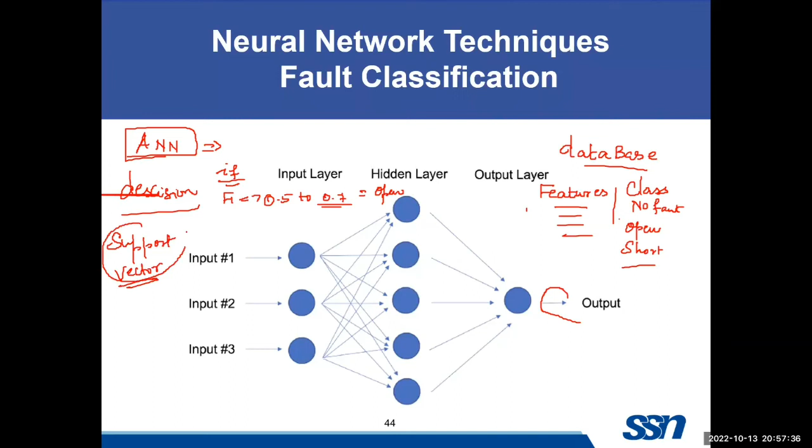So I'll just take up this support vector machine and I'll explain how to simulate this in MATLAB, right? So any one technique you can adopt. All these things come under machine learning techniques. For a machine learning technique, we need to have data, and we need to have a model that will be used to predict.

So we need to train the model such that whenever we give unknown data, the output will be predicted. So that is required, right? So here we have different learning: what we call a supervised learning algorithm, and what we call an unsupervised learning algorithm.

In supervised learning itself, we have one thing which we call classification, and another which we call regression. Classification in the sense we are going to classify whether there is a fault or no fault. Regression in the sense if we are doing a simple addition program, addition, subtraction, those sort of programs, we can call it regression.

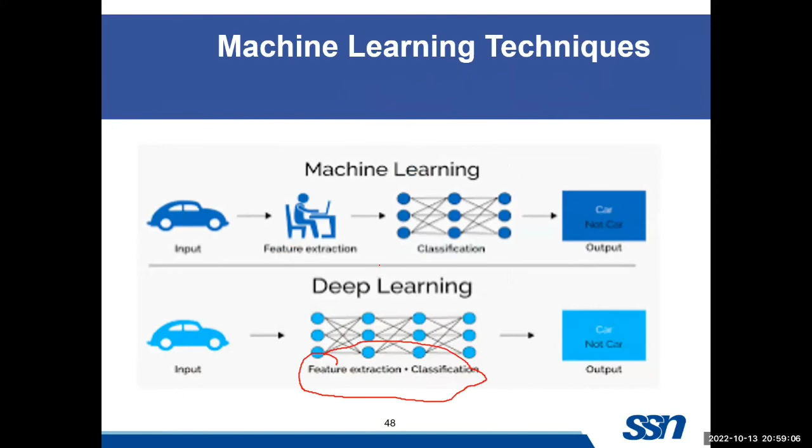In deep learning, the feature extraction as well as classification are built in a single stage itself. There is no separate feature extraction stage. So that is the main difference between a deep learning algorithm and a machine learning algorithm, right? So we'll take up a support vector machine. Support vector machine is one of the widely used algorithms for classification.

It is a supervised algorithm which is widely used for text and image classification, handwriting recognition, data mining, bioinformatics, and medicine. So we give the input as features. Whatever we have discussed so far is this: we have extracted the features, and once the features are extracted, we give those features to a machine learning based classifier, and this classifier will say what type of fault condition it is.

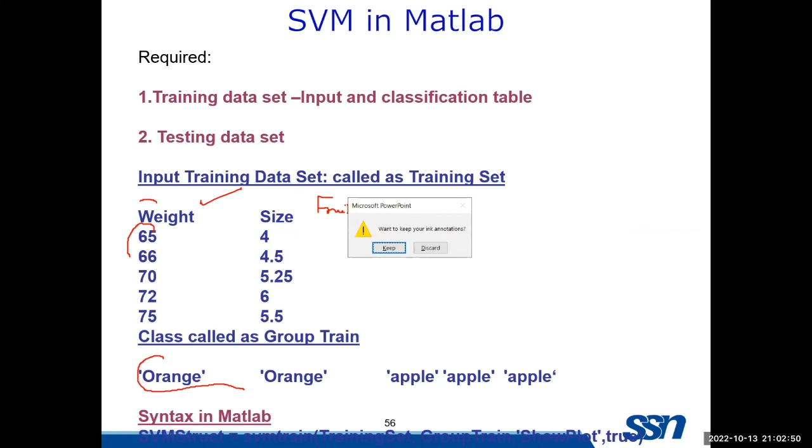We can execute this in MATLAB with a particular syntax. Suppose we want to do this in the MATLAB environment. I'll just show the command. There is a command, svmtrain. In svmtrain, we give the input as the training set. What is the input to the SVM? The input to the SVM is the training set.

Once it is done, suppose a new input is coming. When we give a new input, we need to classify it. What is the syntax for it? svmclassify. We have created an SVM structure based on training, and for that we give a test set as input. When we give an unknown input, it will classify the unknown input into the corresponding class. It will try to fit it in. That is what a classifier actually does. So this is how we can do it in MATLAB.

So what is the goal of SVM? SVM will try to maximize the margin around the hyperplane. This is the optimal hyperplane. How will it arrive at it? It will try to have a distance that clearly discriminates between the two classes. So it will maximize the margin with the help of the support vectors.

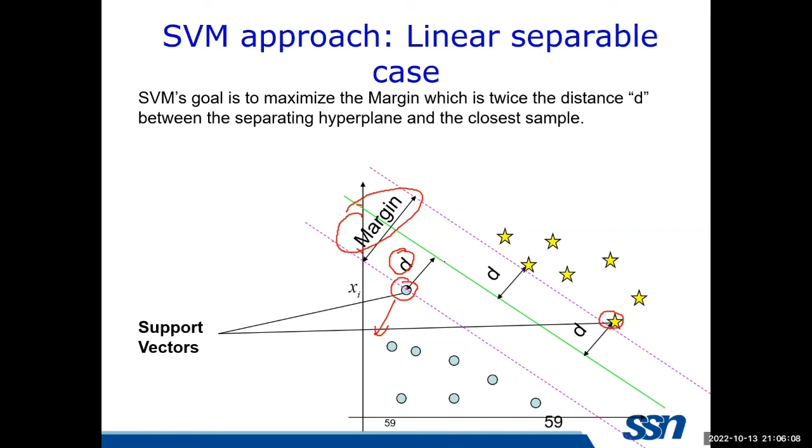These are all what we call the support vectors. These are all the support vectors, right? So it will try to find the distance such that from this, if it is D, it will be able to classify this. Again, if there is a D, it will tend to classify it. So that is it.

Now, suppose we have more than one class. What we do is we tend to map this two-dimensional space to a higher dimensional feature space. The original input space can always be mapped to a higher dimensional space where the training set is separable. Because when we have more than one class, it is difficult to separate it when we keep only two dimensions. So we tend to go for a higher dimensional space such that we'll be able to classify it easily. So that is the thing for multi-class classification.

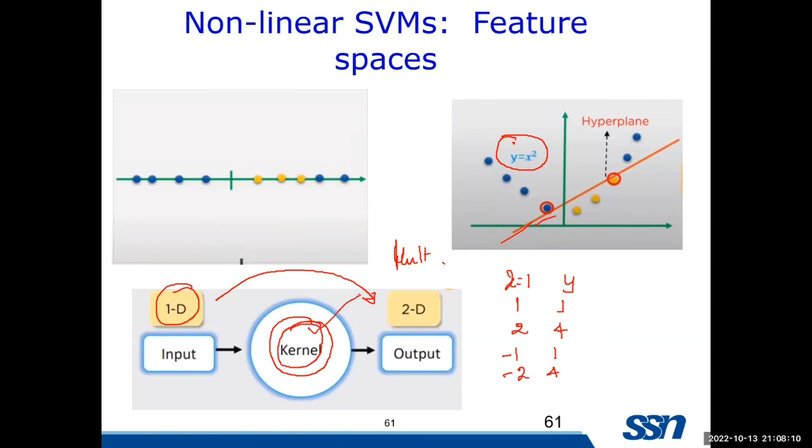So whenever we are going in for a multi-class classification, we need to incorporate a kernel function. So what is the purpose of the kernel function? It will try to transform to a higher dimensional space. Again, all these things are available in MATLAB. You can directly use it. So we have some kernel functions: a linear kernel function, a polynomial kernel function, and a radial basis function. All these things are used for mapping.

I have also given a reference for this, so you can get it for a multi-class classification. For a multi-class classification, you can go for a polynomial-based classification, or you can go for an RBF function. But generally, the RBF function is the preferable method to map it to a higher dimensional space.

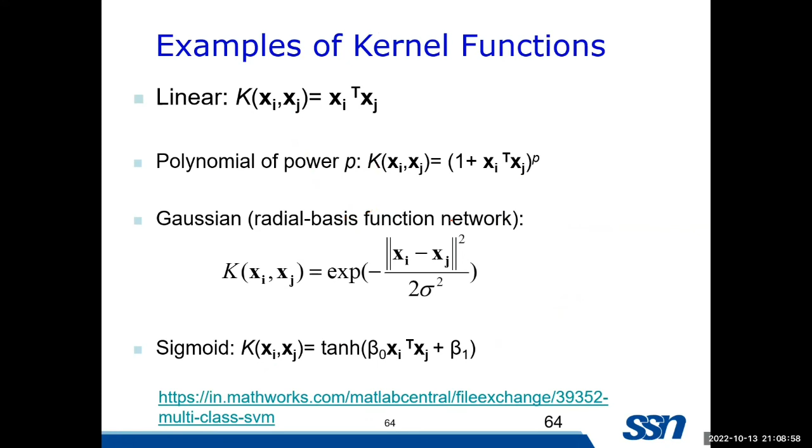Right. So once we do that, how do we tend to classify? Suppose we have a 3-class problem. There are 3 classes here: green, blue, and red. So first it will take two. First it will classify x1 and x2. Then again it will take x1 and x2, but see here, the data that is taken is class 1 and class 3. The x1 and x2 are the coordinates. But see here what is taken.

Here we take green as well as blue. Here we take blue and this; we can call it the round and the square. I will say like this: we take circle and triangle and draw the hyperplane. Here we take circle and square and draw the hyperplane. Here we take circle and cross, and then we can draw the hyperplane. Like this, we can separate it, and then we can try to draw the hyperplane.

So we take one thing and then we try to classify the rest. So like this, it is done. Right. So we convert it into a one versus rest, and then we try to classify it. So this is how we do multi-class classification. So this is how it is done.

Right. So to summarize how it is done, we have a motor. We sense the value, we give it to the hardware part, we extract the values, and then maybe the program of S transform and classification can be in our system, and in this system we'll be able to classify whether there is a fault or not.

We sense the values through the sensors, and we give the input through a serial port or some port to the system, and we can assume that in this system we can have all the algorithms that we have discussed, like the feature extraction part and the classification part, and then we can say what is the type of fault, and based on the type of fault, we can take a remedial action. So this is how it is done.

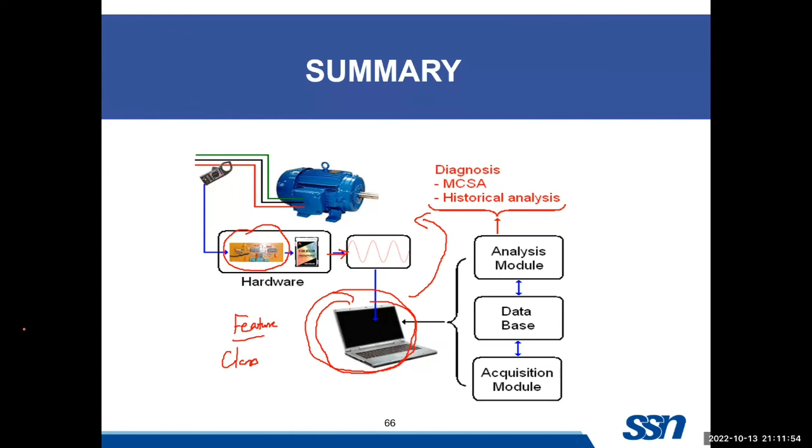And this is the thing that I have discussed so far for fault classification with respect to electrical machines. So we have an analysis module, a database, and an acquisition module. These three modules are very vital. So this is how it is done.

Right. So I have just touched upon the different kinds of machines which can be used for electric vehicle applications, and then how to extract the features, and then how to apply machine learning algorithms for two-class classification and multi-class classification problems. So this is the overall summary.

One more video I have prepared that, for want of time, I'll share with Muttamilan sir so that you can see it. In that video I have covered how to simulate the SVM part in MATLAB, so you can also make use of it.